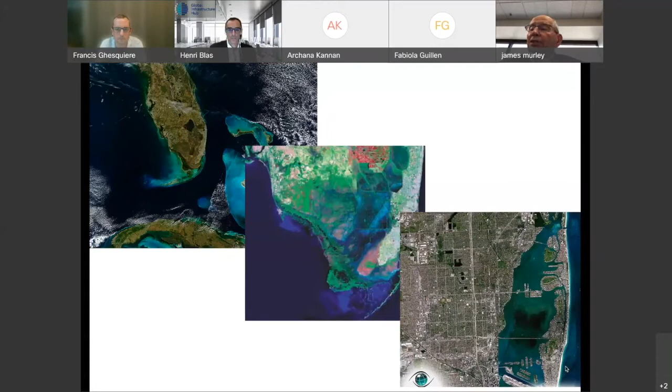So again, we have to think about our investments across a transect, if you will, starting at our ocean and beaches. And our beaches are infrastructure. So that's a constant investment we make to produce multiple benefits from our sandy beaches facing the Atlantic Ocean. That's our main protection from coastal storm surge on our barrier islands. So while they're maintained for recreation and other environmental purposes, the investment in infrastructure comes from their ability to deliver protection from storm surge over the long term.

And then across that transect going to the west, it goes all the way again to the Everglades, but it includes agriculture and many different ways that the landscape has been invested in and frankly changed over the last 100 years. I would tell you right off the bat, Miami-Dade County and the cities and the population would not be here if 100 years ago we had not started to find a balance between managing the land relative to the water. And if we're here 100 years from now, it is because we maintained that ability to manage the land and our uses of it relative to a rising sea.

There's lots of challenges in that, but I think that it's important to understand in our geography and perhaps other places in the world that we're working on history as how we've dealt with this, and that's going to drive the way we make our future investments. Next slide, please.

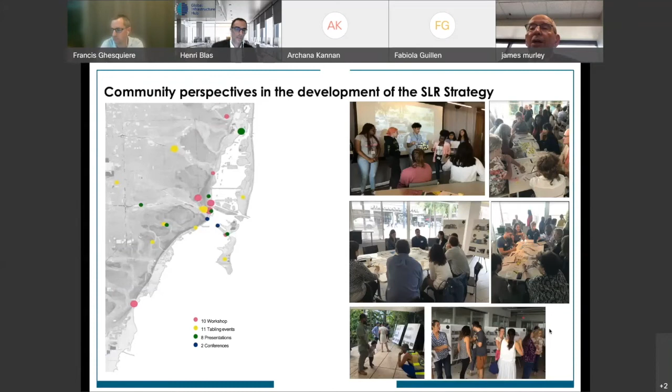While we are focused on sea level rise in this document, we understand that what sea level rise is for us, perhaps around the world, is what we often call, using a term that comes from the military, a force multiplier. It makes all of these other events that much worse. So it's not in itself an event, it's really a long-term stress. But these impacts that we get from shocks and other activities are all going to be amplified by sea level rise. And that's how, when we make investments in these impacts, we're considering how sea level rise and resilience can relate to that. Next slide, please.

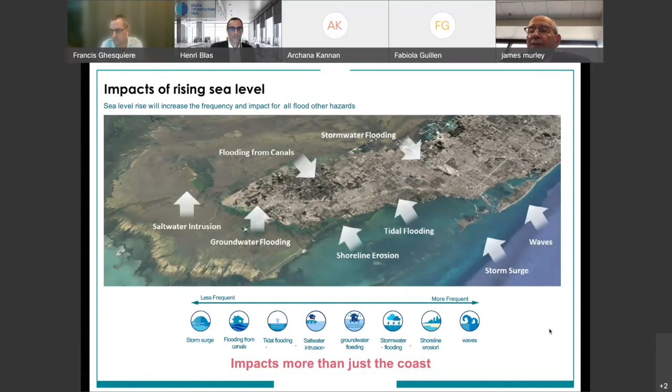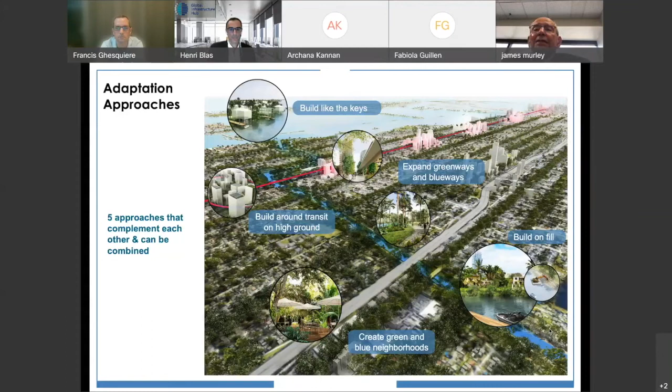So some of these approaches, again, relate to our geography. We're very impacted by any fluctuation in groundwater. And groundwater, when you see a canal in South Florida, and we have a lot of them, that's essentially exposed groundwater. With our geology of very porous lime rock, we have to adjust by pumping and other systems the level of the water to the land. So we have filled in the past, and we'll continue to use that in the future. Next slide.

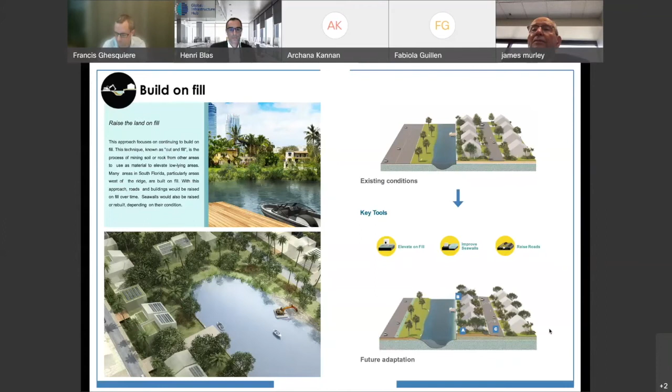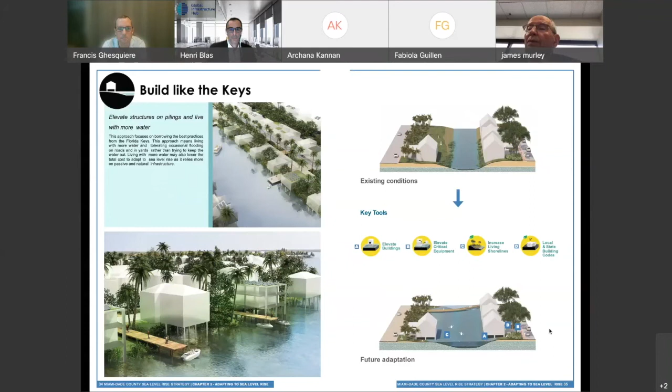We'll elevate, which is when we say the Keys, that's the famous Florida Keys, an iconic string of islands to the south of our county. They have found their own way to adapt, and we'll mirror that in certain locations in our county as the water rises, which will first be indicated by a rise in groundwater. Next slide, please. I mentioned building around transit, which is an ongoing priority for our community. Next slide.

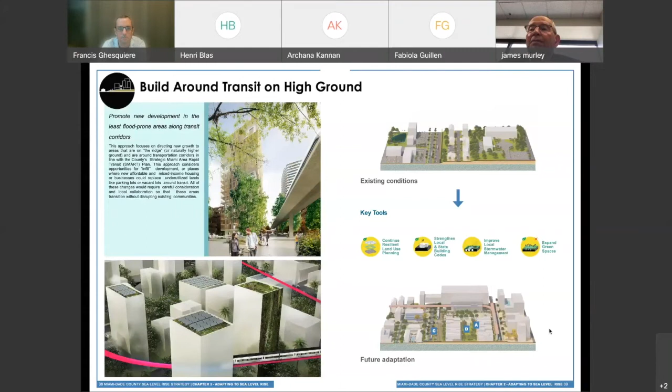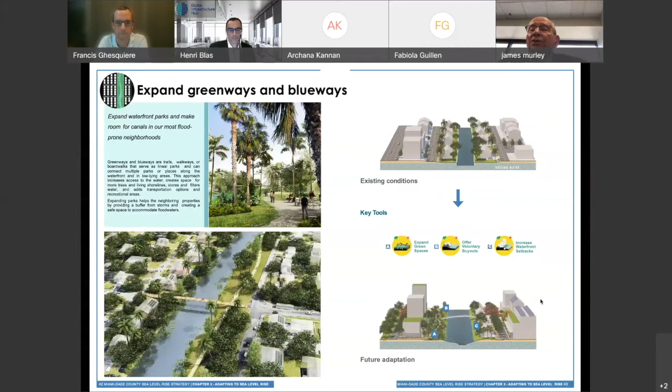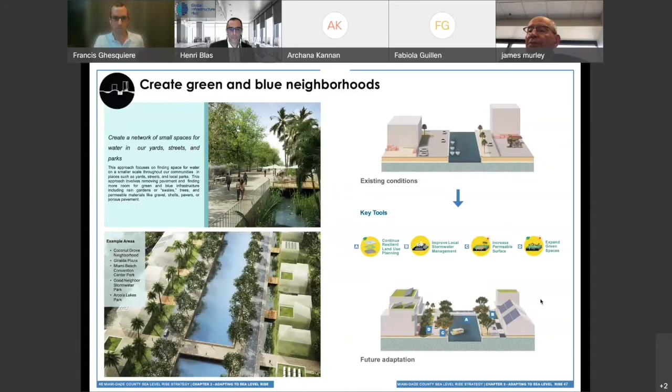The canals and the greenways and blueways that relate to them, and the parks that can make use of that area, will be another focus of making that adaptation. And investments in these greenways and blueways are just as important as some of the larger investments that we make. Next slide. And our neighborhoods also will be adjusted in relationship to those changing conditions. Next slide, please.

So I want to go over some of the key projects. Next slide. I won't go individually, but I'll really focus on how we present them. In the United States, we work closely with the United States Army Corps of Engineers on a lot of projects. The importance here from an investment standpoint is local government is looking to partner with the Corps on cost share from 50-50 on up to 65-35, and in some cases 100%. So the Corps is a very important partner in our infrastructure investment, and we try to coordinate our projects at that level. Next slide, please.

We keep track of the projects we funded to be able to indicate how the county and other partners are making investments that relate to our sea level rise strategy. Next slide. And we're obviously careful to keep a list of projects that we don't have funding for that will allow us to be prepared when funding becomes available at either the state or federal level to partner for moving these projects to implementation. Next slide. We have key actions in our strategy. Next slide.

And I want to focus just on one of them, which is called adaptation action areas. That's where we take all of the detail that I've described and go onto the ground at the curbside level, at the house level, at the street level, and start to understand how those broader implications relate to a neighborhood and how we can provide a long-term infrastructure investment plan for that area. We're currently working in an area along one of our canals. Next slide, please.

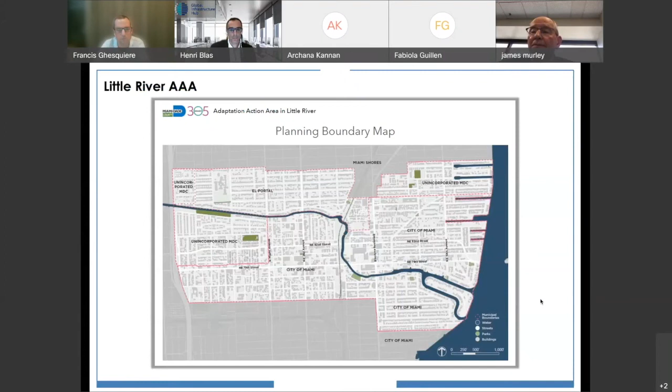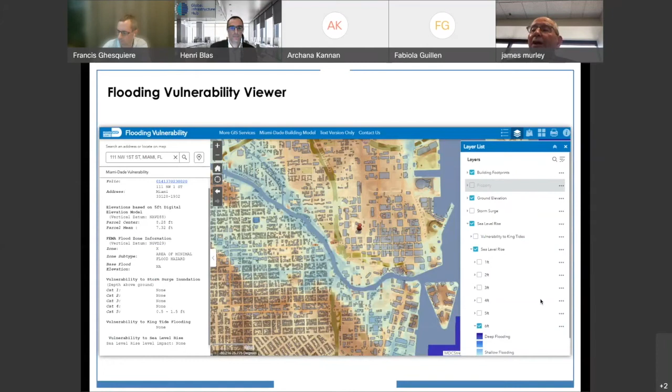Elevation's a relative term in Southeast Florida. If you're at 15 feet, you're high. So when you're at 5 feet, which is probably the areas in shades of blue, we know that we're going to have to focus on investments. This particular one is the Miami River, which really flows right through downtown Miami. Next slide, please.

Where are we looking for funding to assist us? The state of Florida finished a legislative session and put aside a resilience grant program of $600 million. I would note that $500 million of that is coming from the American Recovery Act, which is a national act that passed and is distributing funds at the county and city level. We have a $9 billion annual budget, and we look for any opportunity in that budget to adjust investments in infrastructure to make them more resilient.

And finally, we're happy to see that the president just a few days ago announced another $1 billion towards essentially grant funding to local governments to assist in mitigating damages before the storm, which is an important change in the way we have approached disaster resilience in the past. Next slide.